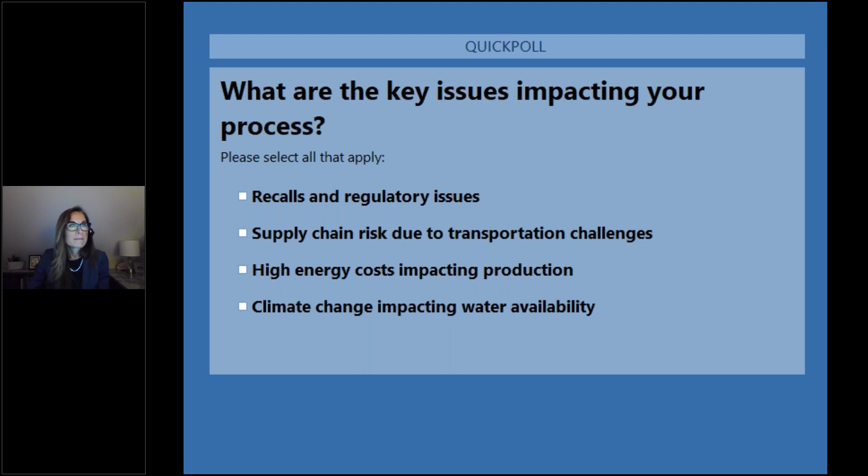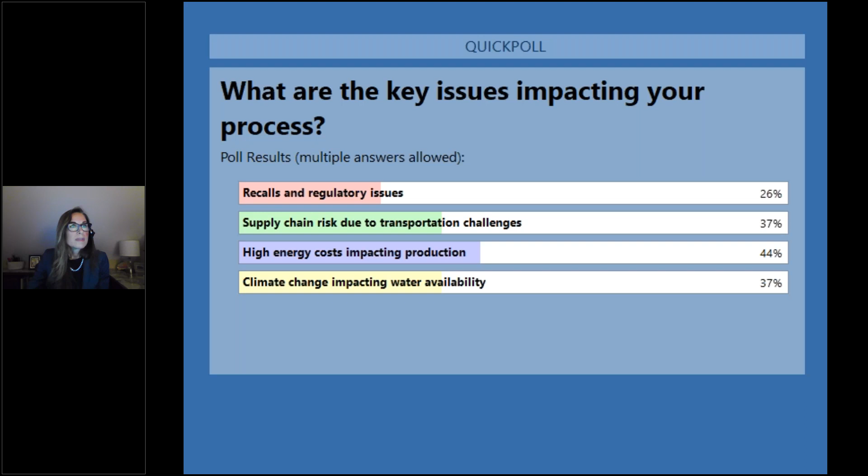So we have as the top concern that came in with this group today the energy costs and how that's impacting production. No doubt, water is a very demanding resource, and energy to actually produce product as well. So I think no surprises here, supply chain risks and climate as well as top priorities for this audience and for your operations. So with that, it's a great segue into our discussion and where we go from here.

Where we're going to go now is really the emphasis around water treatment solutions and how these are targeted to help you address the challenges you face. It's great to have your input to help even further focus that discussion today. And I do want to remind you, as you're thinking about questions, this next part of the discussion, I hope, will seed some additional thought about changes or technologies you may be implementing, because we do have the Q&A period that will follow this. So disinfection, again, is our focus in terms of water treatment today.

Food and beverage in total spend upwards of almost $1 billion on disinfection technologies to mitigate challenges that you face. And so that really is intended to help you ensure the water quality and compliance requirements that you have, whether that's starting even at the level of source water and how that impacts the flavor and the output of your product, to ensuring compliance with environmental and regulatory standards for your region and for your products.

Disinfection technologies are absolutely key to enabling sustainability, whether that's improving overall within your process and operations to allow you to have more energy efficient technologies in play. It can be helping avoid scale, corrosion, cross-contamination that would require more water. So we can also help you even with reuse water strategies.

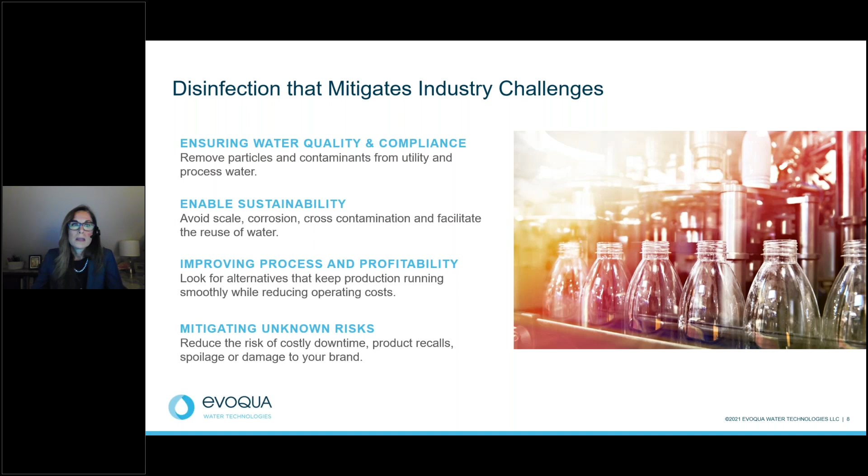The other key thing is that, when we looked at that poll and many of the challenges you face, with cost being one of the top, it's clear that we need to continue to focus on how we can improve profitability and help you achieve your targets as a business and your overall objectives within your operations. And then again, disinfection is key to mitigating unknown risks, right? So if there is any sort of contamination, microbial growth within any particular stage of your process, that can cause costly downtime, product recalls, and those are things disinfection can help you prevent.

Okay, so let's look at a beverage processing plant. This is just maybe a more typical processing plant. And I should say that we've got companies on the call today from all different types of beverage processing, from breweries to wineries to bottlers, manufacturers, soda, water. Really, we've got a really nice cross segment of the beverage industry today. And so this map may not look exactly like your facility, but it's certainly representative of many of the key elements.

So from a processing standpoint, one of the number one areas that we first look at from a treatment standpoint is that water intake. So what is your source water? Is it well water? Is it coming from a municipality? Is it some combination of that? But what level of disinfection needs to happen in that first stage of the water coming in? And there are certainly other aspects to that water treatment, right? It's not just disinfection, there will be RO, filtration, but today we're just focusing on disinfection, so you'll see more emphasis on that.

As the water has been treated, it may be in holding tanks or storage tanks where further disinfection and treatment potentially comes into play. Depending on the type of end product that you have, you may also be processing for water dechlorination. So many steps in that process, just the water coming in, and in that manufacturing process. Then you get into the utility water treatment. So that's your boiler water, your cooling water. Many of the beverage processes today will have pasteurization or some other heat element, and that water then goes into a cooling water cycle. The utility water section of processing is also a very high demand aspect, as you know, within your total water process.

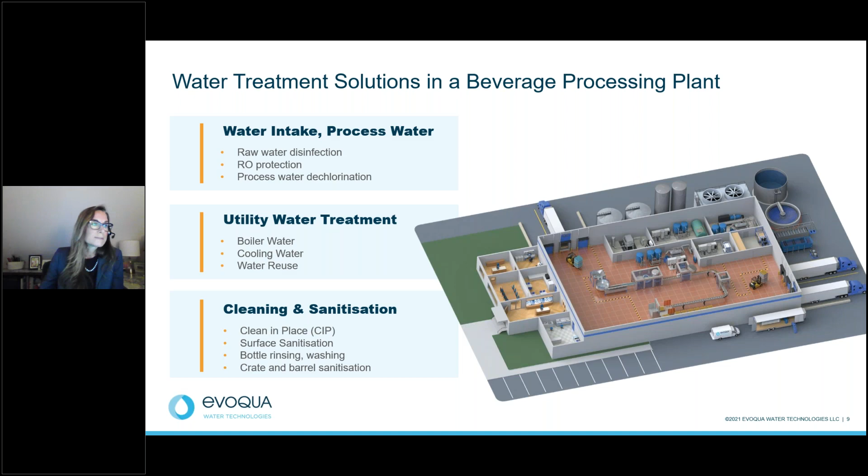And so as you think about that end-to-end cycle and how you approach operations, one of the big pieces of that is when you look at that cycle, how do you start to implement sustainability? How do you start to address some of those challenges of energy costs, of actual environmental and regulation and water scarcity and water availability?

I know, and there's probably some on the call today, that some of the large multinational beverage companies are leading the way with sustainability initiatives, really working to replace as much water as they're using. So essentially kind of getting into that neutral, not carbon neutral, but almost water neutral position of a true life cycle, that what they use is actually then brought back to the earth in a clean and sustainable fashion.

So I will emphasize though, sustainability and implementing some of these pieces into your operations is certainly a journey. You don't get there overnight, and it's really a process that you start to look at where you can make changes and how that impacts your product, how that impacts your operations, and also even the bottom line.

And so one of the areas that you may be considering right now is how do you reduce chemicals for disinfection, whether that's regulatory or environmentally driven. UV and ozone are both incredibly effective disinfection technologies that can either support chemical disinfection that you have within your plant today or help you reduce the amount of chemical reliance that you have.

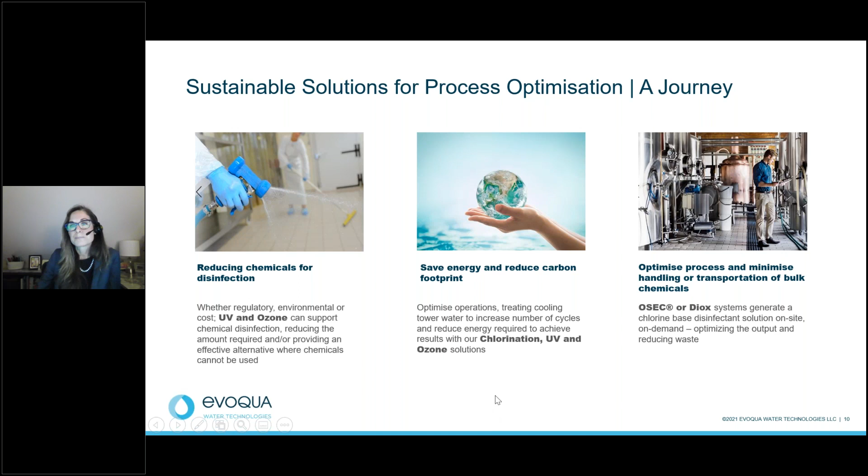And then the third piece of this journey is how do you get to the point where you can do more on demand, where you can generate more on site so that you can reduce the transportation of bulk chemicals, if you use bulk chemicals. And so again, this gets into more chemical processes within the operations, but you can absolutely move to on-site generation, whether that's of chlorine or chlorine dioxide. Our on-site generation systems allow you to really generate just what you need on demand. So again, reducing waste.

Okay, so I think this is the best section, besides the panel speakers who are fantastic, but really this section gets into our case studies. I want to share with you customer examples of how they've taken some of these strategies that I've talked about, taken these technologies and incorporated them into their processes and achieved the results.

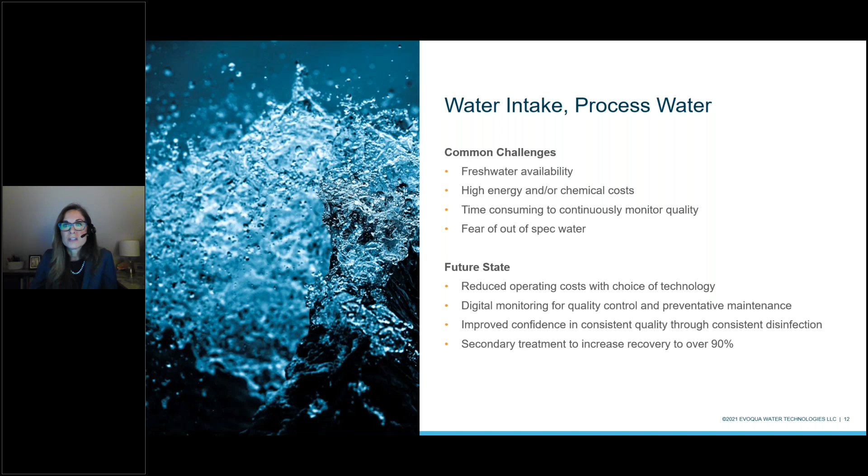So I'm going to come back to that initial process water. Where is your water coming from? If we're dealing with municipal water, city water, you may be getting sources of water that already have contamination, which could be pharmaceutical, chemical, or other bio contaminants. In the beverage industry, you want to ensure taste quality is consistent. You don't want to have anything that impacts your shelf life. So these are real challenges that we face every day, and they can be addressed with the right disinfection technologies to help you achieve the results and the consistency in the product that you're looking for.

So I'm going to start with this particular bottling company that produces for a global market. They primarily produce sports drinks and teas, and they have a 24/7 operation and also operate as an organic bottling facility.

So the challenge that this particular company faced was that they actually have multiple sources of source water. So essentially they're using both well and municipal water as a part of that main ingredient. And so the challenge that they had there is that they had, of course, to ensure consistency in the product, that they're not introducing any contaminants into the actual product itself. Because they had multiple sources, it required treatment.

And then the other thing is they also had fluctuations in flow. So that really created a challenge for them that prior to implementing a UV solution had cost them downtime and product recall because of that inconsistency of the water coming in, as well as the treatment of it in the process. And so we worked with them to implement a UV system that's actually validated for drinking water.

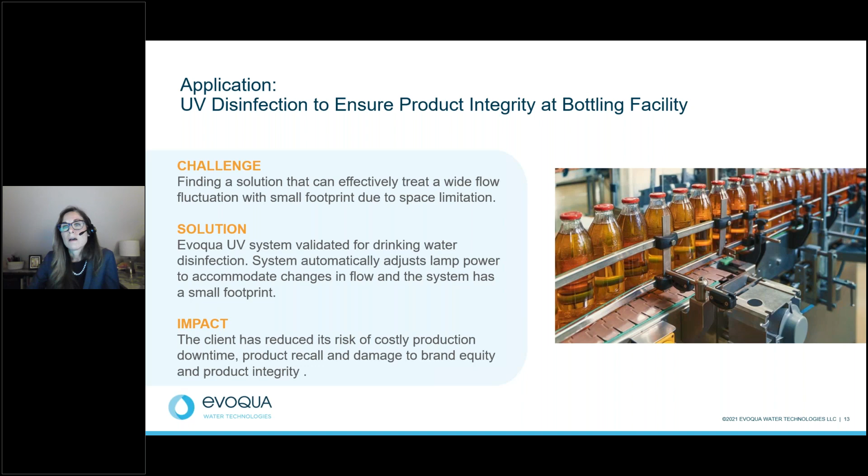And the benefit really of this is not only did it allow them to treat the water coming in and have a very consistent ingredient water, but it also automatically adjusts to flow. So from an overall operations standpoint, it became fully integrated into the system, helping reduce any additional manual operation or changes to that process.

The next customer example I want to share with you gets into that utility water treatment. And as we talked about, this is another big area, extremely demanding on water and supply of water within your process, but also one where, because we're talking about storage, we're talking about heated water, there are certainly new areas of contamination that come into the process here, and we want to try to prevent any sort of deposit scaling, things that are going to require you to use more water, more cycles, or even prevent you from being able to reuse that water.

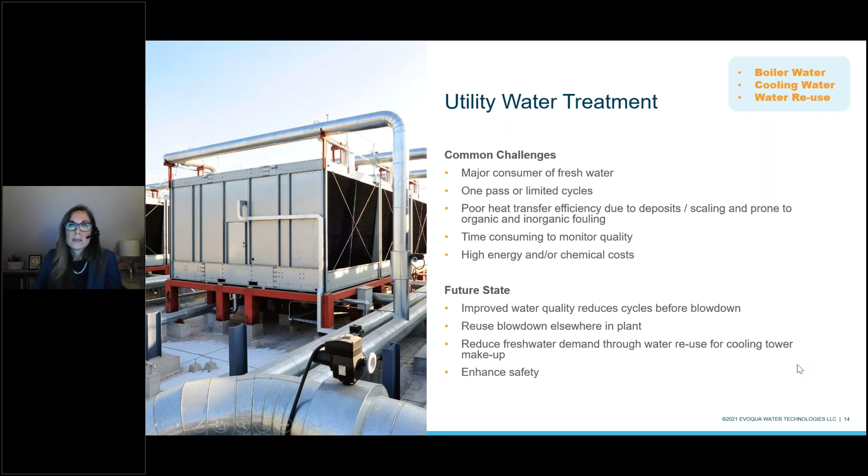Because truly, if that water is treated and continually monitored and managed, there's opportunities to also create a reuse for that water. And so this particular company was looking to address their cooling circuit, and they were dealing with issues of water fouling and biofilm buildup. And so by implementing our on-site generation chlorine dioxide system, they were able to eliminate the risk of hazardous contaminants, prevent fouling, and improve the overall efficiency of the cooling circuit.

And by doing that with the on-site generation, again, we get into improving efficiency and reducing your production costs. By doing this on demand, it's really just generating what's needed for the facility, and it also really aligns well to workplace safety requirements.

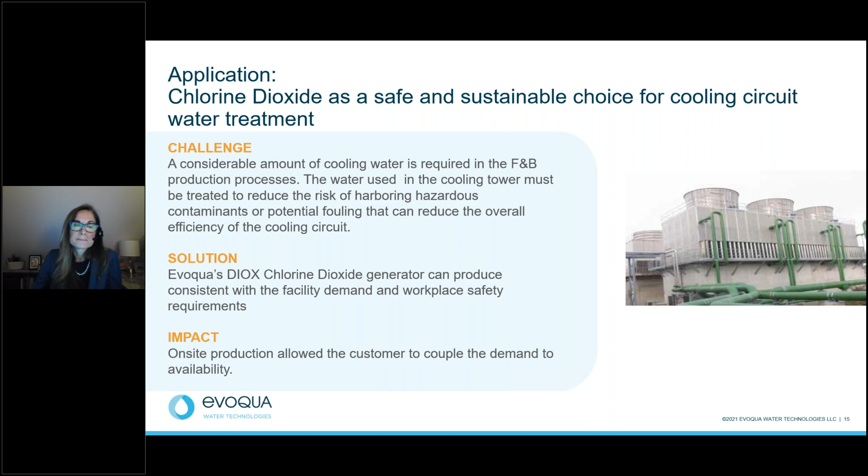Okay, we're getting close to the discussion with the panel, so hopefully you are all starting to think of the types of questions you have, and this has given you some good insights. Maybe you're in the process of making changes here, or maybe you're using technologies like this and have questions for our experts.

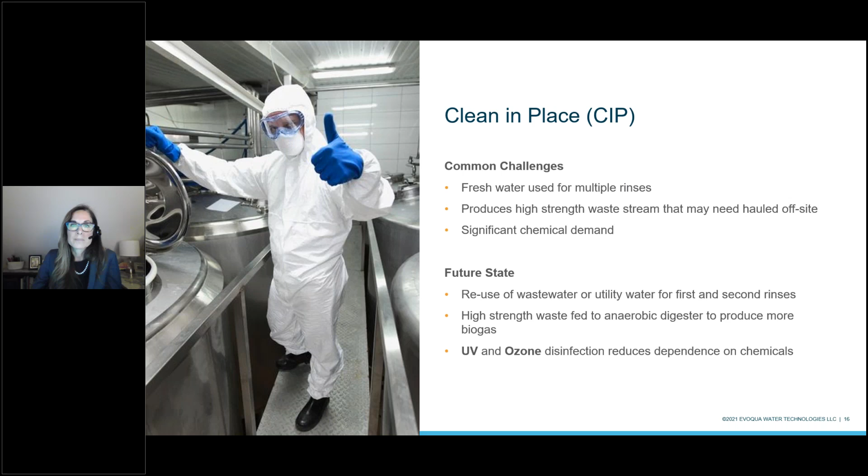Another very critical element of your process is clean in place, ensuring that whether it's fruit juices, sodas, or whatever your product may be, you're able to clean the interior of those operations. And this again is one where we see a very high demand on fresh water. Without the right technologies, it may require multiple rinses and could require unplanned downtime. And really with UV and ozone disinfection, we can provide you a very targeted application that gets you achieving your results on the first pass, second pass, without having to schedule downtime to do further cleaning.

And so this example is a soft drink company that was facing challenges with contamination even after their clean in place process. This was unfortunately causing unplanned downtime to production to further clean the equipment. And so they are using two of our disinfection technologies. They implemented one of our ozone systems to be a part of that clean in place process.

And then because it's a soft drink company wanting to ensure the flavor and ingredient mix was exactly right, so each bottle would taste the same, they also included our UV wafer system to destroy any ozone that would still be in the water after the application. Ozone breaks down very quickly back into oxygen, so there is not a byproduct, but this is just a way to ensure that the ingredient and flavor are maintained at the ultimate integrity that you're targeting.

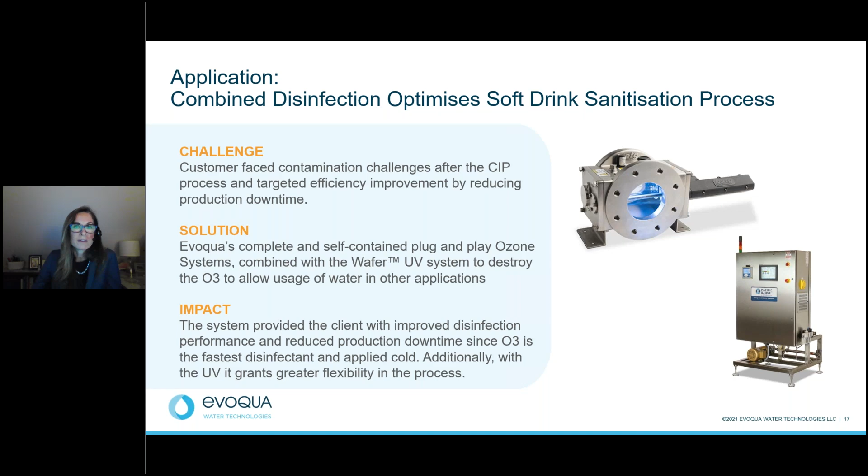So another great example where a combination of disinfection technologies is going to help you achieve your results and reduce downtime. And so again, ROI payback is very quick when you think about some of the risk in this overall process. Okay, this is the last example I'm going to share with you, and this is getting into cleaning and surface disinfection. As I mentioned earlier, this can be as much as 60% of the water that you use in your facility, even if your number one ingredient is water in your product.

Oftentimes, surface cleaning and disinfection has a strong dependency on chemicals, and this can lead to cost, safety, or just overall issues that you may be looking to take out of your operation. And what we're able to do here is, again, work with you to help match you with the best fit in terms of technology, and whether that's on-site generation of chemicals that allows you just to use less, have it very targeted, really from a safety standpoint, designed to improve process there.

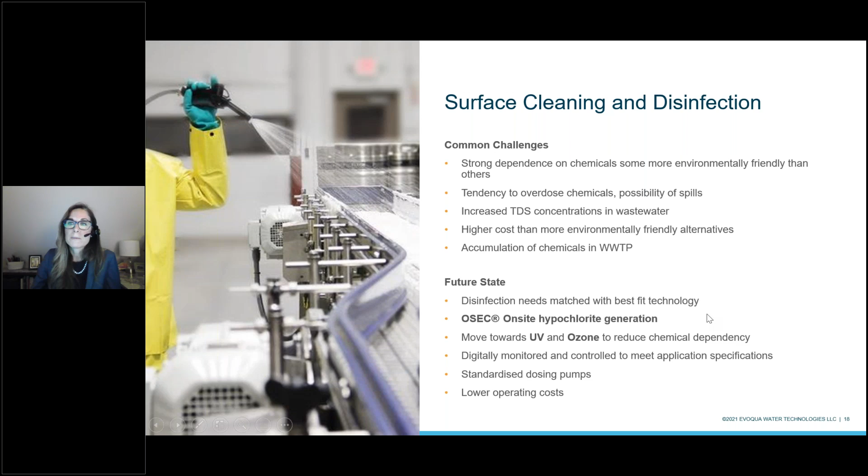And then if it's not a chemical application, again, UV and ozone are also very effective technologies for surface cleaning and disinfection as well. And so this last company, actually another beverage company, they operate in an environmentally protected region. And because of this, that actually put a higher standard on what they could use in terms of chemical in their process. And so even with surface disinfection, their requirements were that they had to remove chemical from surface disinfection to meet the compliance that they needed for that region that they operate in.

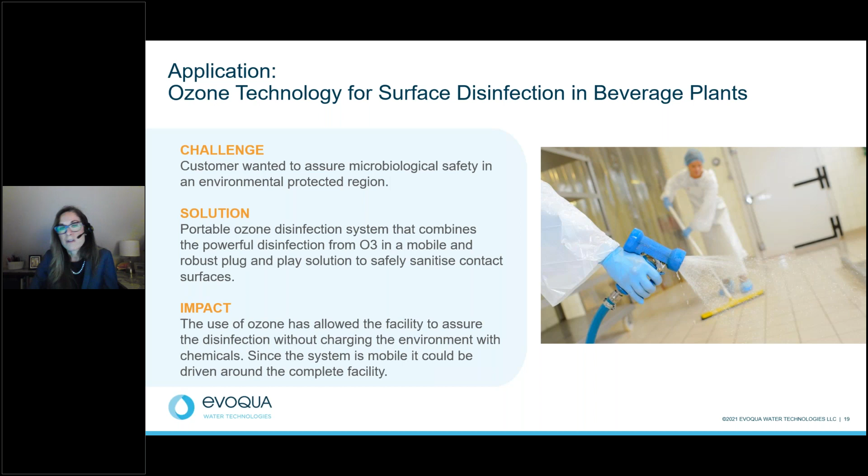And so here in this instance, they were able to use our portable ozone system. So essentially able to move the system with them where they needed to be and achieve all of their surface disinfection targets and operate safely within the environmental requirements that they had. So as you can see, in a number of different approaches, different applications, this is certainly just a handful of many different approaches that can be used for disinfection technologies, and really trying to capture that end-to-end process and how to integrate systems into that.

And so, as I mentioned earlier, we offer a complete portfolio of disinfection technologies. I think really exciting, making it easy for you. We can continue to work with you, augment your system, augment your process as needed. And then we also bring with that all of the monitoring and control technologies to ensure any microbial contamination is detected and eliminated from your process.

Oh, you know what? One thing I would want to do here, I'm going to launch one more poll before I jump into the panel. So I went through a lot of information, talking about sustainability and the products, the technologies that help you achieve the results from a disinfection standpoint. And in the earlier poll, you shared with us your top issues right here and now. As you think about your strategy and your plans for the future, I'm going to launch this poll to ask you again, if you think 5 years from now, looking at some of the examples that I shared with you, what your top issues will be. Please go ahead and select how you see your business evolving and the challenges with that.

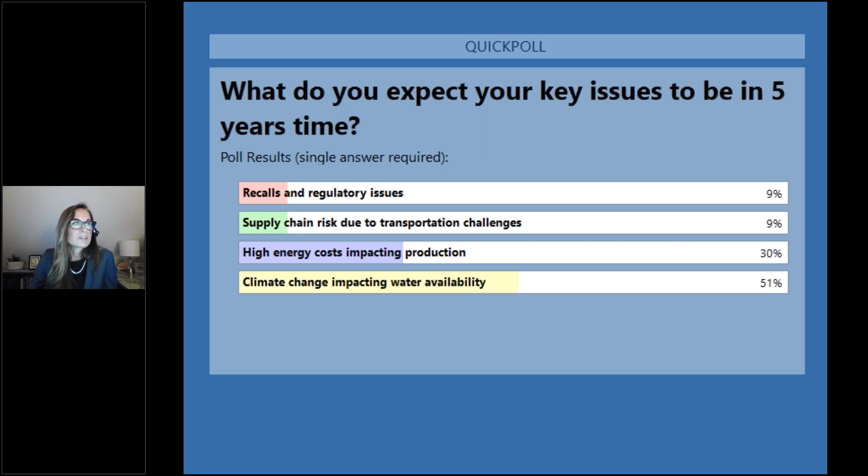Okay, these are coming in really quickly, and I don't want to bias anybody, but a very high focus here on climate change and water availability. And I think no surprise with that, right? I'm going to go ahead and close the poll and I'll share the results with you. But as we kicked off the discussion, climate change and water scarcity is absolutely a growing issue and a number one concern. So no surprise that that comes in as, 5 years looking out, your number one area of focus.

Okay, so just to recap, we are here to work with you. We are excited to have such a great turnout today. I want to remind you this is a 4-part series. So today was very high level, looking at process and operations and how we can work with you to address those energy costs, help ensure you keep your plants running efficiently and safely, as well as ensure that your product, your consumer, your brand are all maintained and protected as well.

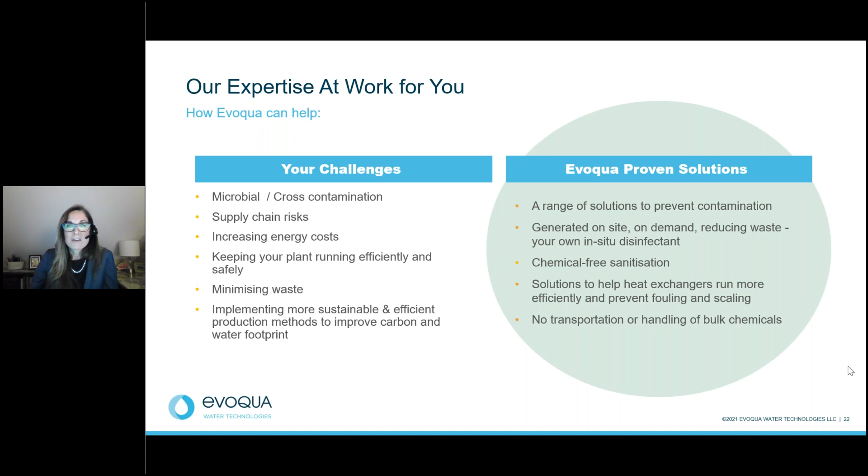So I am actually now going to invite my panel to join me on screen. We've got decades of experience, over 100 years of experience if I add up everybody here on the call with me and their expertise in the industry. So Tony Lee, who is with us today representing our UV product portfolio, has over 30 years working in the UV industry, and he leads our product strategy and is the product manager for that. I've got Shailesh, who leads our gas feed chlorination as well as our chlorine dioxide products. Ryan Flood, who is leading our ozone. We've been keeping Ryan busy there with that, and also our on-site generation of chlorine.

And then Sueli, who has over 25 years working in the food and beverage industry and is a resident expert really on application of these technologies across your process and across the industry.